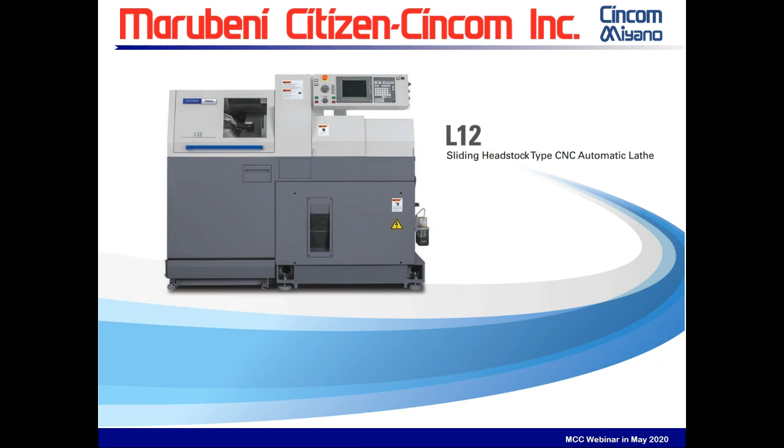I want to start today by taking a look at the L12 and some of its key features. Towards the end of this presentation, I want to invite Randy Nickerson to answer some questions. We'll have a whole section just on the laser and a chance to ask your questions with Randy directly. He is the head of our laser group, and that will be towards the end of our presentation.

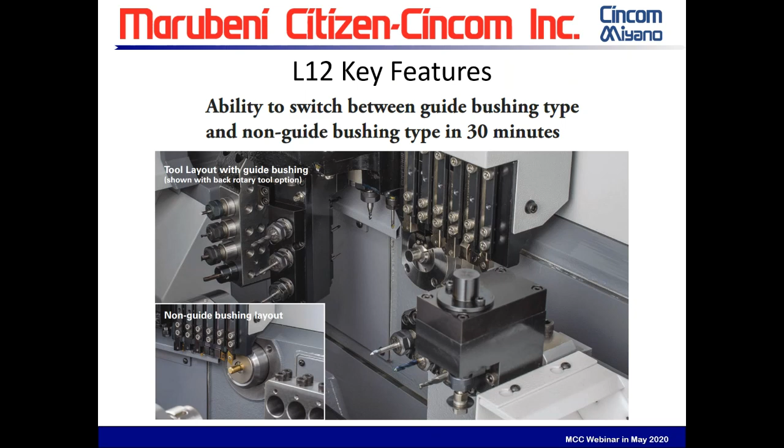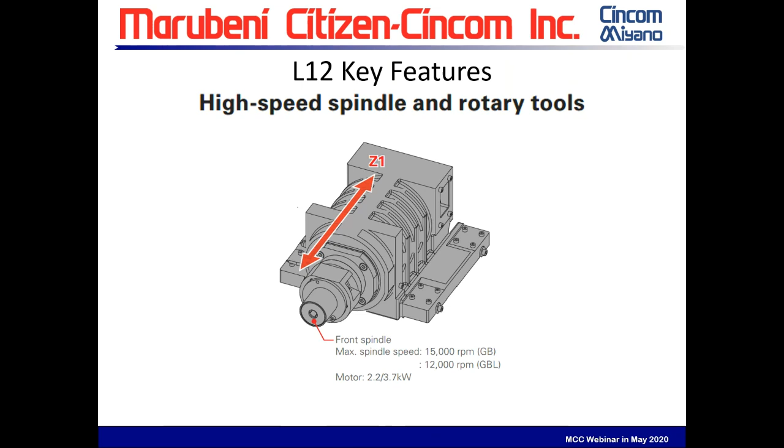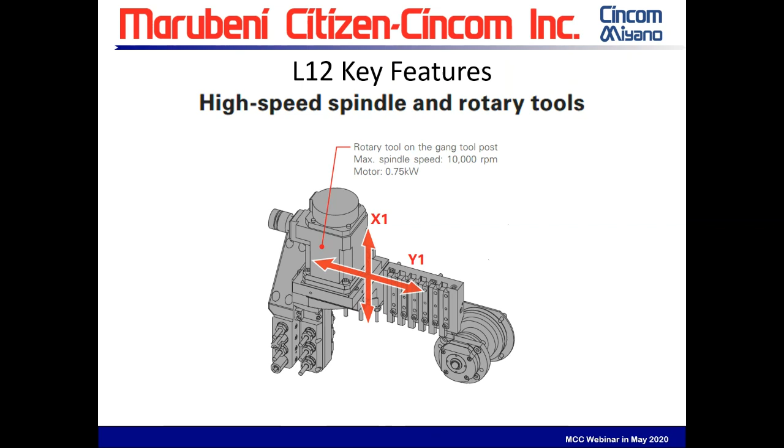Some other features: we have high-speed spindle and rotary tools. Our main spindle, once in guide bushing mode, allows us to run a maximum of about 15,000 RPM. In non-guide bushing mode, it drops down to 12,000 RPM. Its motor is rated for about 2.2 to 3.7 kilowatts, depending on torque. Our rotary tools on the gang have a max spindle speed of 10,000 RPM, rated for 0.75 kilowatts. Looking at our back spindle, that has a 10,000 RPM maximum and up to a 0.75 kilowatt rating. On this L12, we have the back rotary live tooling with a max spindle speed of 9,000 RPM, rated about 0.5 kilowatts.

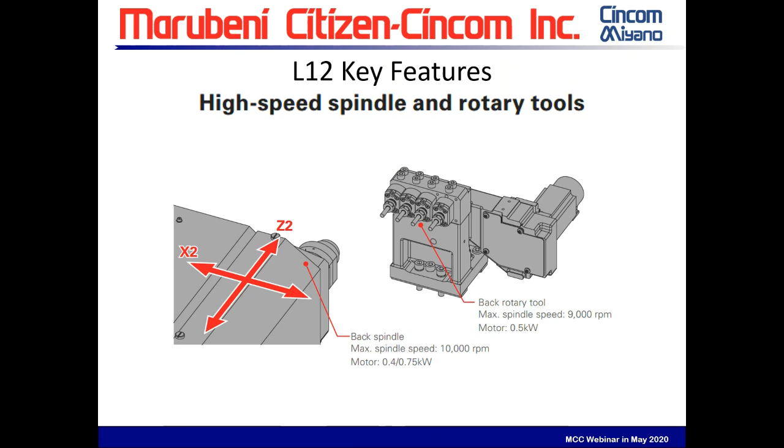Another key feature is on the front of our L12, we have a wide operator access door. The nice thing about this is having this full front door that moves up and out of the way makes working in the machining area much easier.

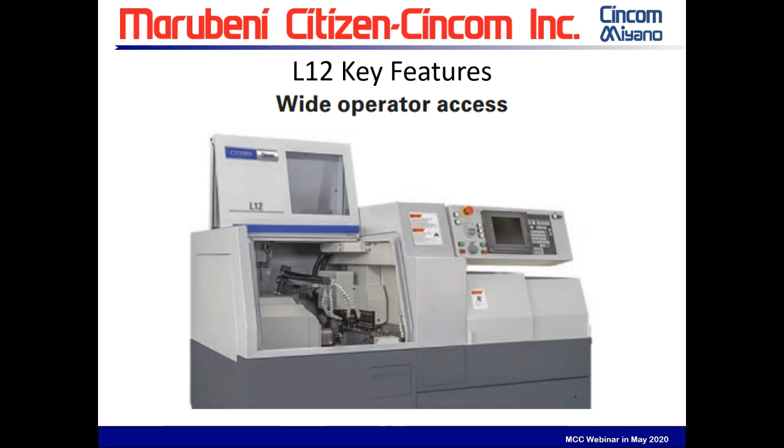Some other key features: the NC program input and output. We have USB, compact flash, RS-232, and Ethernet. This machine supports all 4 I/O formats as standard, so you get all 4 of them - you don't have to have an option for either of the 4.

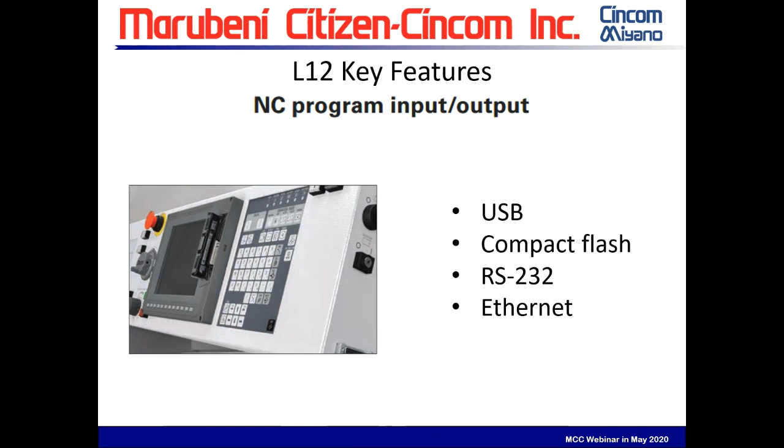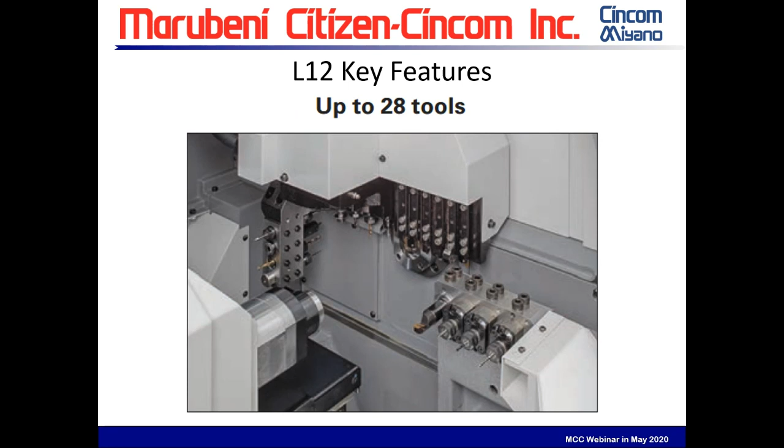Two optional tools I'd like to talk about: we have the GSE 3607, which is 3-face, 3-front, live, and they can be set at an angle, making things easier for cross-side angled holes. On the back side, we have the GSS 1530, which can be used for saw slitting and other features on the live backwork block.

An additional thing not shown here is the CSM4. They are cross live straight spindles, capable of reaching 24,000 RPM.

It's worth mentioning that the first live tool position, T7, located right next to the gang, is a non-removable station. It is ER8, but it only has a shift of 5 millimeters. The remaining removable spindles are ER11 with a 10 millimeter shift from the face of the guide bushing. So T7 allows us the ability to use smaller tooling closer to the guide bushing.

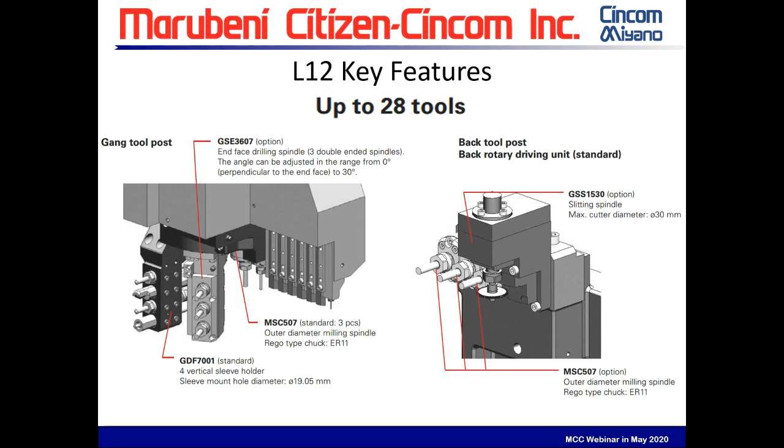As I almost mentioned earlier, deep hole drilling. On the side of this L12 subspindle or back spindle, we have the ability to do standard or deep hole drilling. From the face of the block to the face of the guide bushing is approximately 91 millimeters, or 3.582 inches. So yes, this can be used for deep hole drilling, but it can also be used for standard drilling as well.

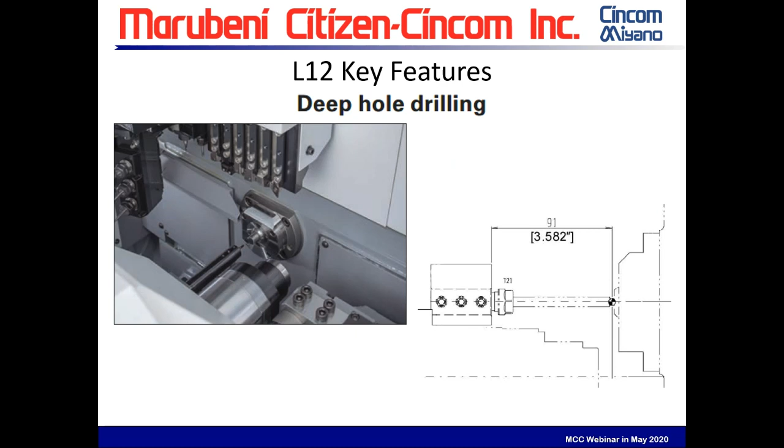Our optional LFV function is for effective machining of difficult to cut materials. LFV, for those that don't know, is low frequency vibration cutting. It's a technology for performing machining while vibrating the X and Z servo axes in the cutting direction in sync with the rotation of the spindle. As shown here, it can break the chips effectively, removing many problems. It's also effective for small diameter deep hole machining and the machining of difficult to cut materials.

For LFV machining with rotary tools, the LFV function and the rotary tool feed per revolution options are required. We have the availability of 3 modes that can be used on ID, OD machining, as well as threading. For more information on this, please speak to your local dealer or any MCC representative, and we'll be happy to provide you with more information.

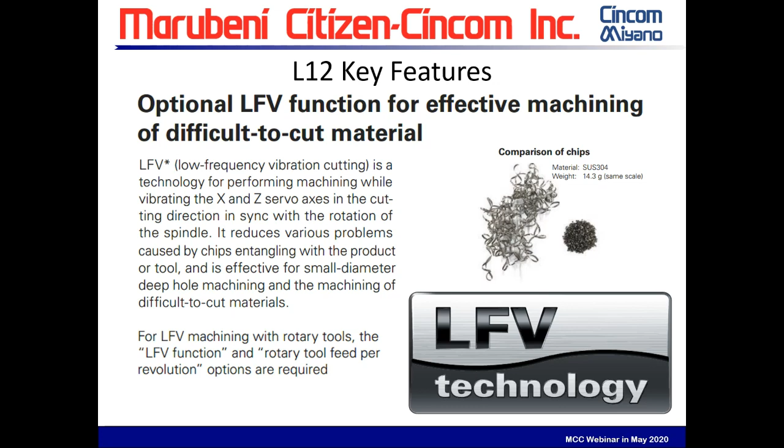We have user-friendly screens designed from the operator's perspective. This L12 Type 7 is equipped with a high-speed NC. We have an on-machine program check function with easy-to-understand illustrations. This can help you prove out a new program or check a new addition to that program, whether it's just running through the program with no machine movement, or using the handle to actually move through the program as if we were machining.

Also, having a visual representation can help everyone, including those new to the Cincom machines. When you're looking at the control, you're looking at a feature, and it has a highlighted picture. It shows you exactly what you're dealing with, whether it's a tool, what tools are in the machine, and a lot of other great features.

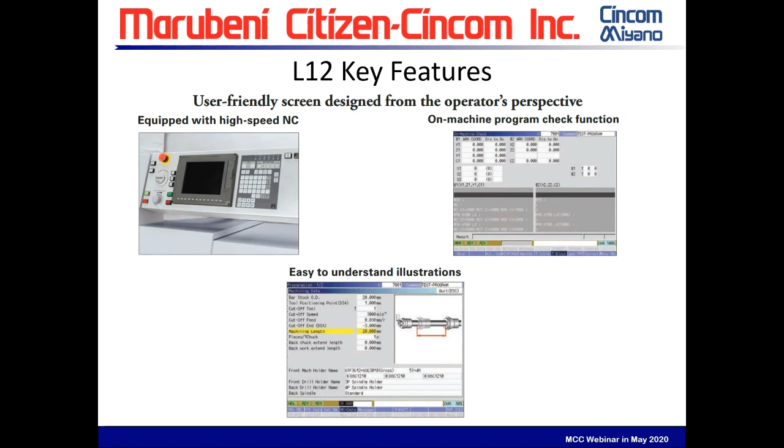Some other features we have include a code list display. Our code list not only displays codes and arguments that go along with that code, but the codes can be inserted directly into your program from this page. So instead of having to go back and forth, you can enter in this code, enter in the arguments, and then just insert it into your program.

Our eco screens can provide information for those who need to monitor power consumption and any other information.

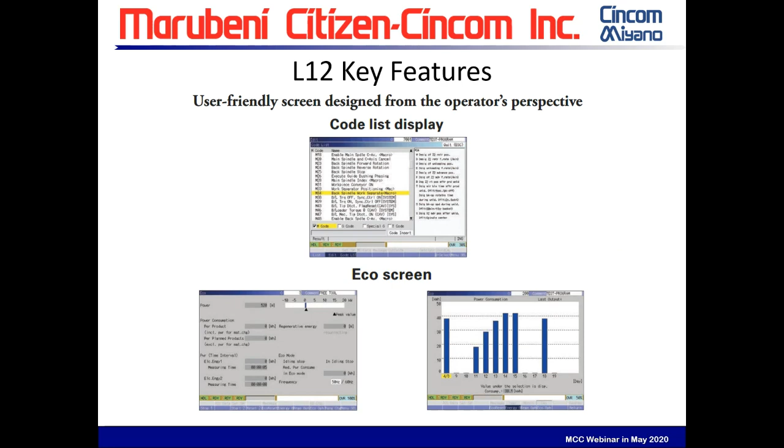Laser cutting and welding. Now we've talked about the L12, and we reach the laser portion of this presentation. We will be looking at the L2000 series laser system. Just a quick note on these systems: they are retrofittable on a variety of our machines, not just the L12. We've developed this as an add-on option that can be attached not only to new machines, but certain older generations of our L series machines. We've also designed it to have as little effect on the machine's capability as possible.

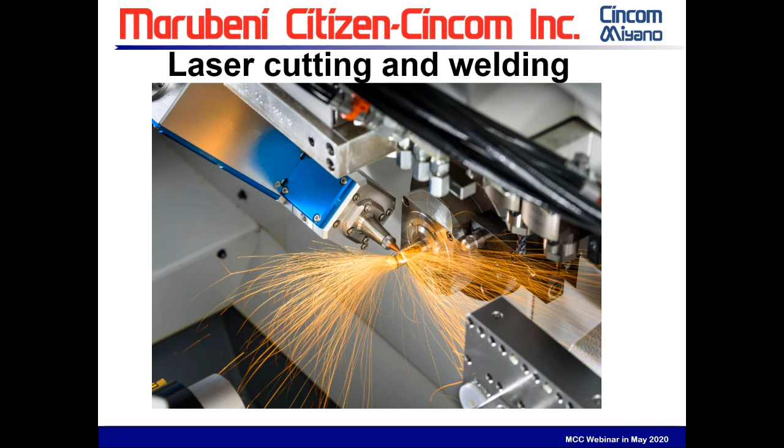Here are some pictures showing the laser head mounted on an L12. Please be aware that when the laser head is mounted, it's mounted in the gang, and we will lose the end work arm, which will have to be removed, and we lose the ability to use one crosswork live station.

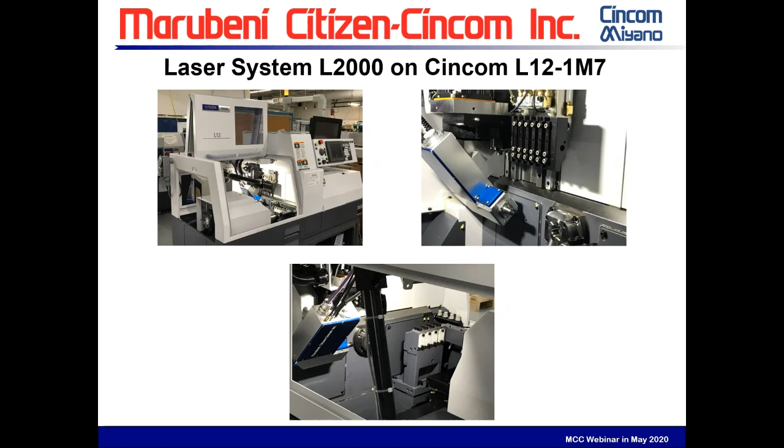These restrictions are specific to the L12. For example, the L20 is different. And depending on which machine the laser head is mounted on, with other machines you have the availability of B-axis and other capabilities with the laser. But in this case, we're just focusing on the L12 Type 7.

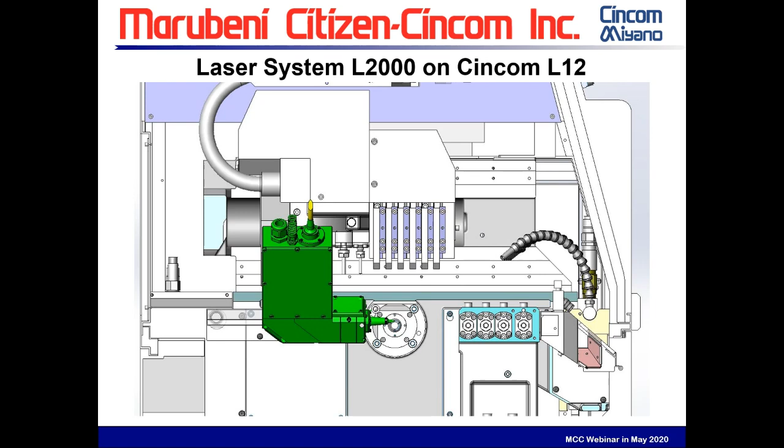Now let's talk about some of the traditional components of our laser systems, or any laser system. What is needed for a laser function is a light source, or laser oscillator, sending the beam through the fiber optic cable, which here is your transfer line, to the laser processing head. Here it is joined by a flow of gas, which here would be our assist gas, and passes through a nozzle to the part, where cutting or welding will be done. The gases we currently use are oxygen, nitrogen, and argon.

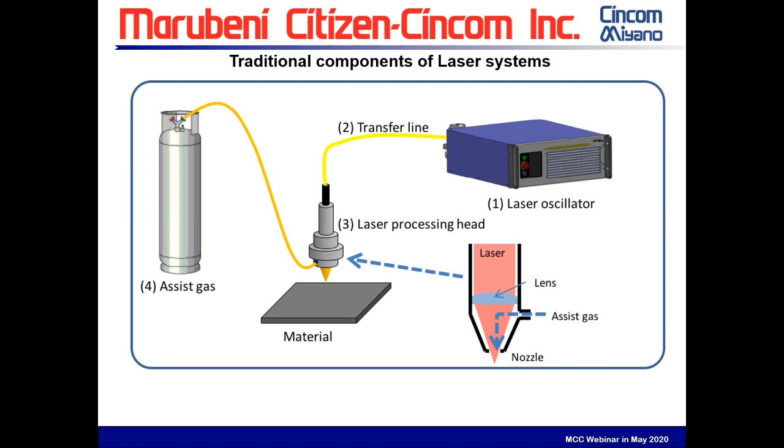Here we see some of the components of our Laser 2000 system. These are the main components. Our Laser 2000 system consists of the control cabinet, which holds the laser, the gas control, and our communication systems, along with the power supply panel. The Gen 2 system will also contain the CPU for our laser computer.

The laser, which is in our control cabinet, has a fiber cable permanently fused to it. The touchscreen PC holds the software that contains the recipes used by the laser during cutting and welding. Now this laser, or the touchscreen PC, is actually mounted at the machine near the control, for easy viewing and access.

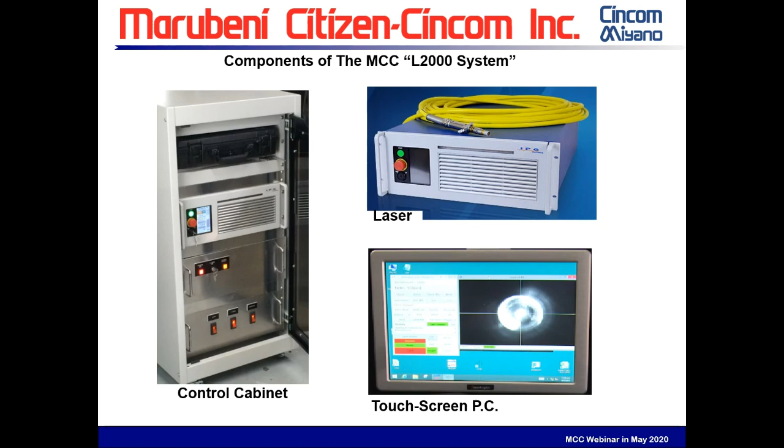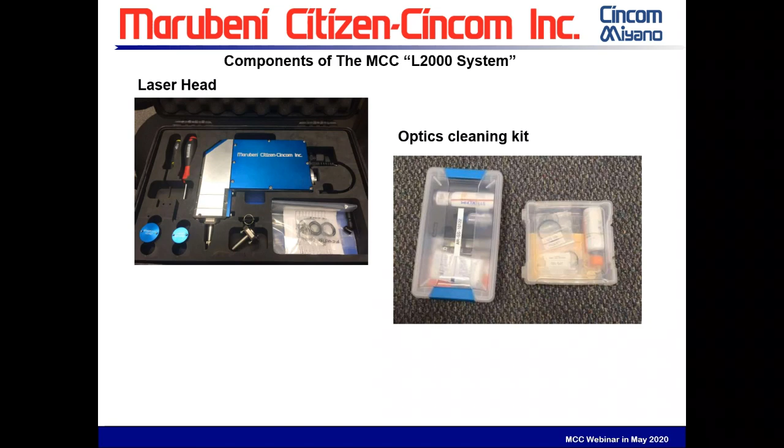Some other components in the picture show the laser head and our optics cleaning kit. The laser head is located inside the machine, as we show it on the gang. Another thing to mention is that our original machine window gets replaced with an acrylic laser protection, which is RoHS compliant and complies with ANSI Z136.1. So this way you don't need to have your glasses on when the door is shut.

You might want to ask, why would we want to offer this capability on a Swiss machine? We have many customers doing laser cutting or welding on a secondary machine, which is very expensive. Any secondary operation that is required adds cost to the part and more quality risks. Just like the twin spindles of our machine save time and money, so too will the addition of the laser into our machines. Now we have the ability to add a laser onto our lathes, but they cannot add a lathe to their laser machines.

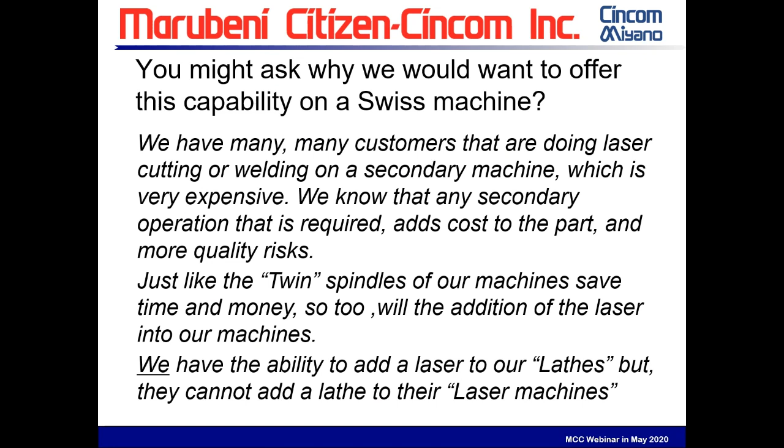Now we're going to talk about some of the benefits of laser machining: near endless geometric shape possibilities, minimal burrs (also known as dross), and faster than EDM machining.

Now, the benefits of laser machining on a Citizen machine: conventional and laser machining done in a single machine, machine accuracies of 0.00001 inch, or microns, an auto loading system which can handle material lengths up to 12 feet, meaning we can also utilize standard length tubing, and completing multiple operations in a single setup.

Now, if you need to do prototyping and don't have tubing to create your part, we can create tubing from solid stock for prototype work. Again, reduced handling, improved process control, and increased throughput. We are really in the realm of being only limited by our imagination and what we can fit into the machine when we start adding the laser to this. Shapes, anything - there are virtually so many combinations of things that we can do, I couldn't even list them all.

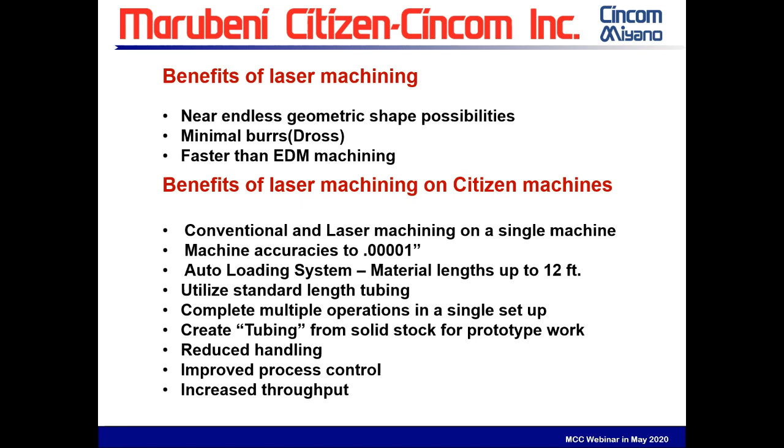Now, going back a little bit to a typical simple laser process, the part requires tubing to be cut and finished to a finished length, then cleaned for loading into a dedicated laser machine for the laser cutting to be done.

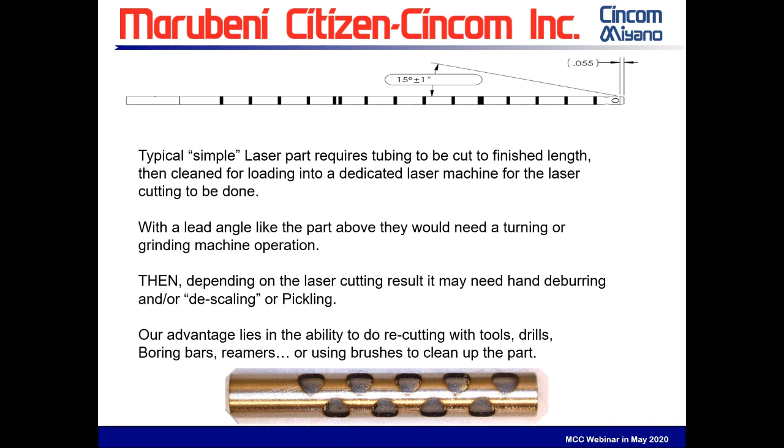Now, I know we're going to be talking with Randy later, but some of the things that are frequently asked are, what thicknesses can a laser cut through?

Well, this is going to depend on the material and which power level laser was ordered. As an example, we have up to 125 thousandths in stainless steel with a 300 watt QCW unit. For specific situation information, please consult our laser department.

Now, what is the width of the laser cut? This also depends on which laser unit and focal distance used, but it can be down to 0.0005, or 5/10. The thickness of the cut and power required can affect this. So again, more power will equal more melt away.

What is the lead time for laser systems? Well, we have them in stock, waiting for a machine to install them upon. Once we have the machine at MCC New England, we can install a test laser in approximately 3 days.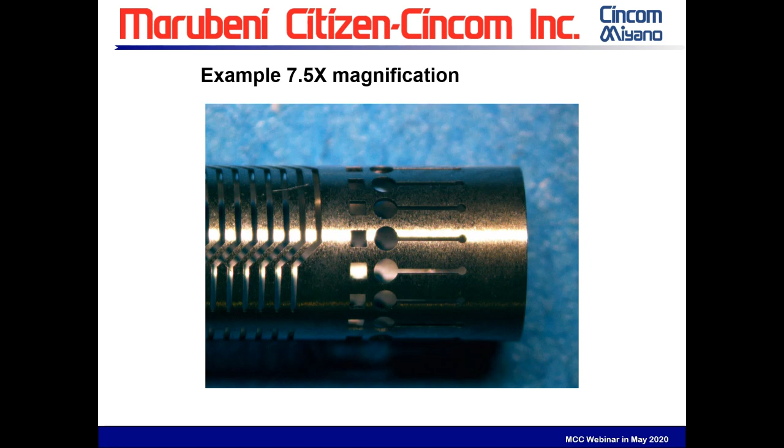Here we have an array of .010 diameter holes at 25x. The time it would take to do this with a drill, I mean, the laser can simply just do this effortlessly.

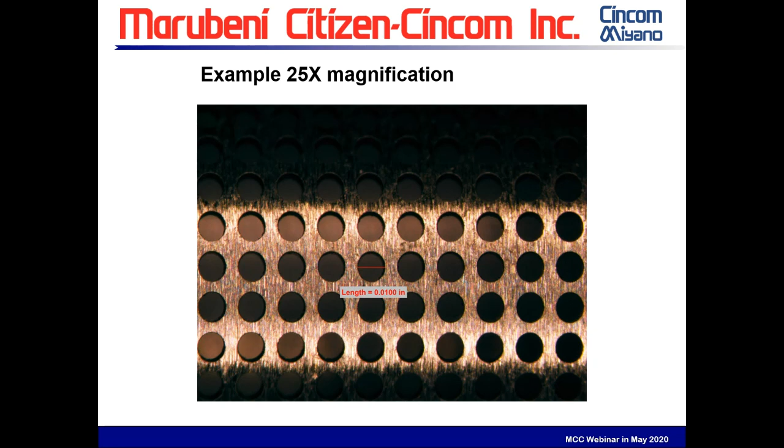Small complex features can be attained by using the laser. Again, looking at this part and this feature, we're at a 30x magnification. The length on this is 6 thou. And this feature wouldn't be allowed with traditional machining.

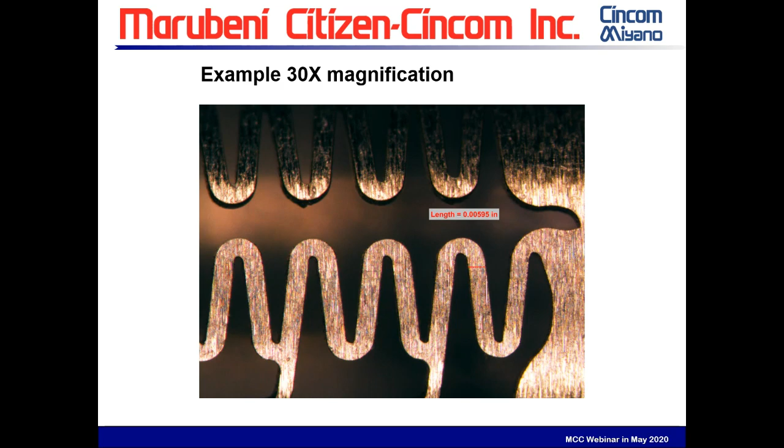Now here we're going to show some examples of laser cut times. We have windows in the top left, there's 4 of them, and the cycle time is about 12 seconds. There's a spiral cut feature underneath that, which has a feed of 2.0, and that's about 13 seconds.

Now we have a stent. This contains 36 diamonds, and that's done in 50 seconds. To our upper right, we have a J slot. Now that was done in 7.68 seconds.

This next thing is .005 and .010 hole arrays. Again, it took 235 or 236 seconds, but there are 360 holes in this feature. Now our stent here is 72 diamonds, so that's 92 seconds - it's a tighter pattern and contains more cuts. Something as simple as a bone cutter, a little over 6 seconds.

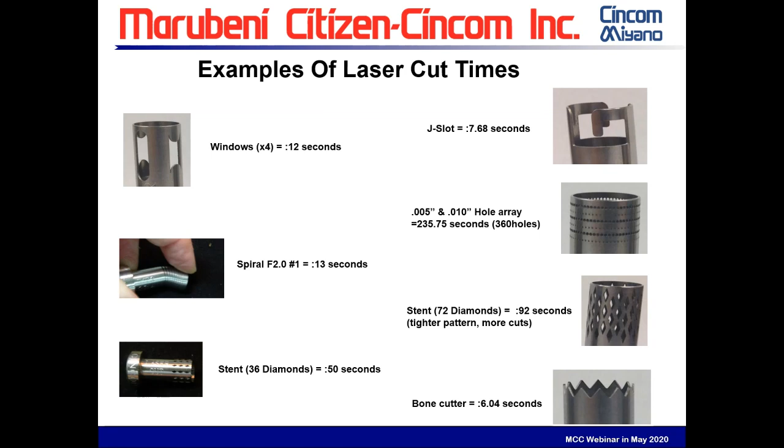Laser welding. So not only are we talking about laser cutting, but we can use the Microconic collet system for accuracy, because the runout on the part in the picture below needed to be less than 1 thousandth 5/10 after weld. And this is doing it with the same laser, so it's not like you need 2 different lasers, one for cutting and one for welding. They both can be done with the same one.

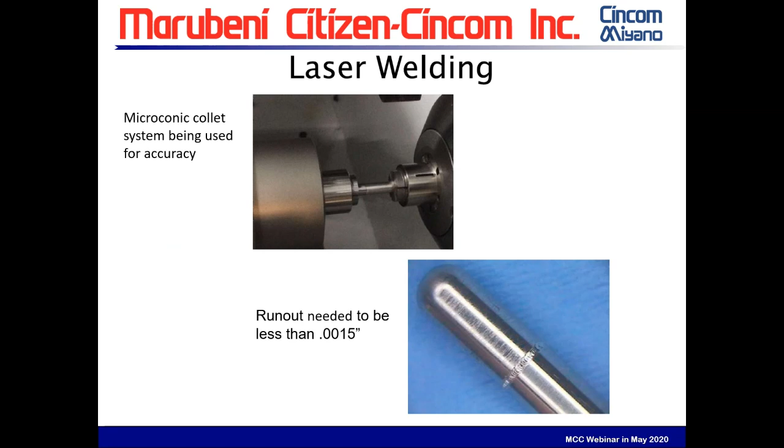Now, the next part, we're going to talk about focal length of our laser optics. On the L12, we use a 75 millimeter focal length. Focal length is changed by the focus lens and the nose piece.

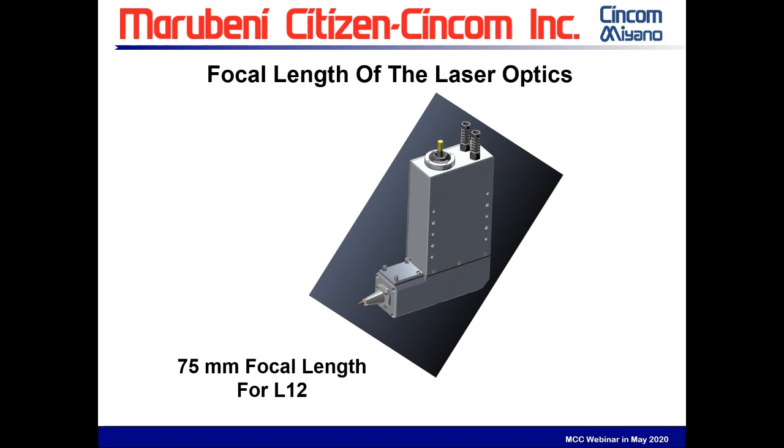Okay, at this time, let's take a quick peek under the hood of our laser head. So now, at the top, we can see our focus adjustment screw. This is all manual adjustment. We also have 2 nozzle adjustment screws, one on each side. Those are both contained in our focus lens housing.

Now, we have the unit down below, and then we have our nozzle retaining nut that's mounted to the cover lens housing.

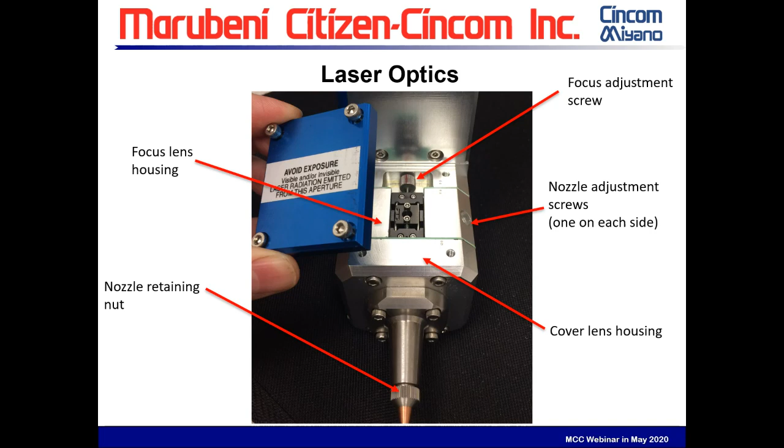Another thing to talk about, beam delivery. The beam travels through the fiber cable and passes through a collimating lens, that captures it and shapes it into an even column. Then it is directed at a deflection mirror, which points that towards another focusing lens, that takes the column and directs it to a point, the convergence of the beam. This point is our sharp focus, or cutting diameter, which will provide us with the cutting or welding action. At the 75mm lens, you're looking at a 10.66 micron spot size.

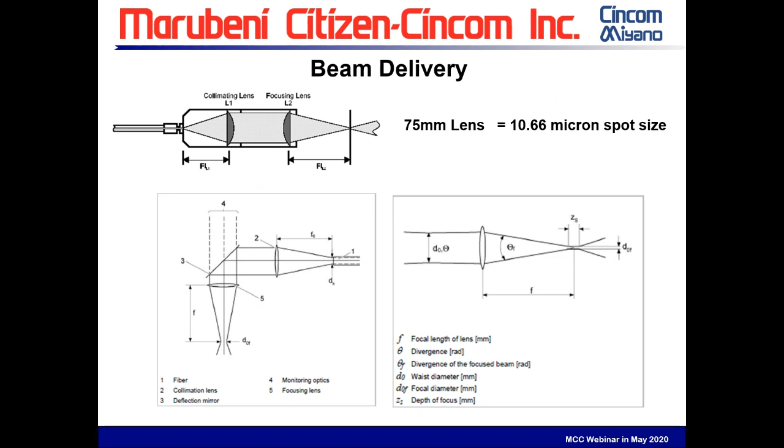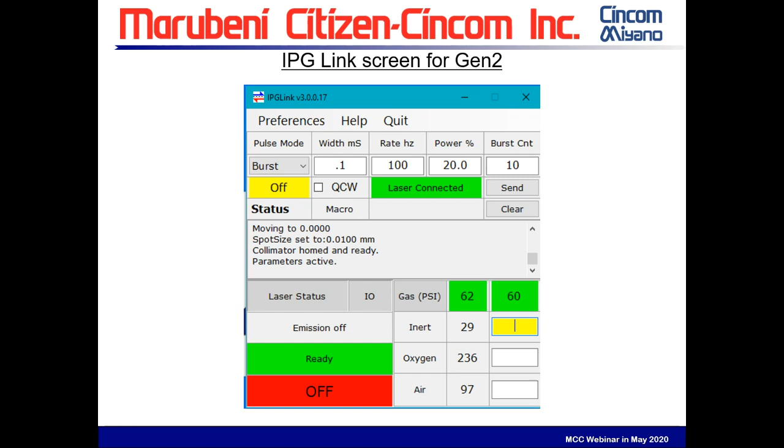Now there are some settings that are needed here, and these are our frequently changed settings with their description. We've got our mode: continuous wave, pulse, or quasi-continuous if available, depending on the laser head.

We also change our pulse width. That's the length or the size of the beam shots. We have rates in hertz, our frequency, which is how many pulse widths per millisecond.

Power. This is the percent of the laser unit to be used.

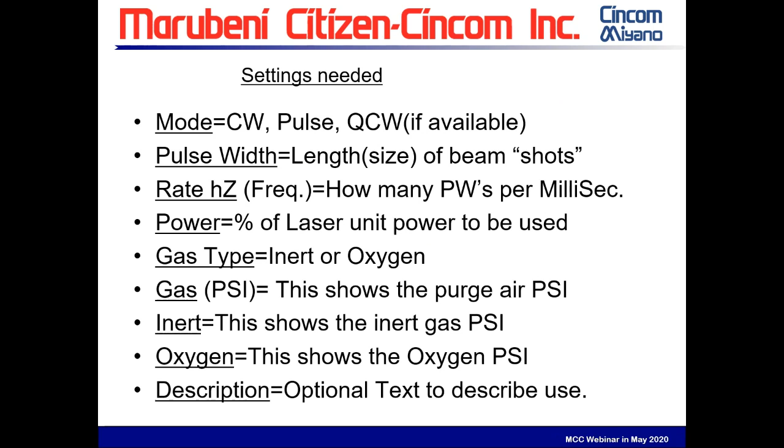Gas types, we have inert or oxygen. Gas PSI shows our purge air PSI. Inert, of course, shows the inert gas PSI, and oxygen will show the oxygen PSI. For description, optional text can be used here to describe whatever is going on.

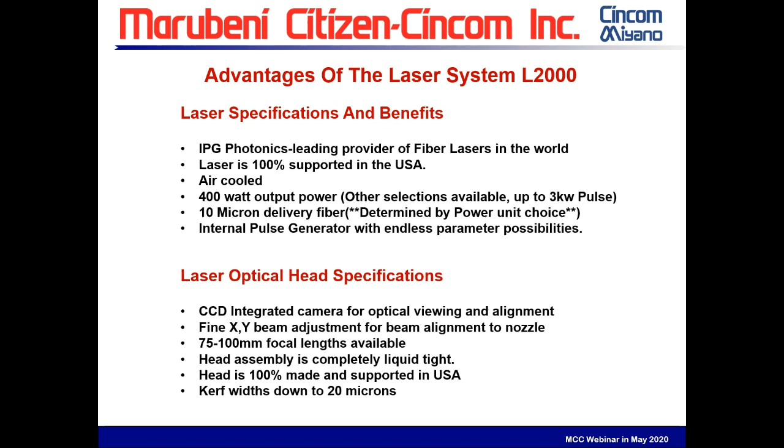Now, with that, we're going to talk about some of the advantages of the Gen 2 laser, new features. With the Gen 2, it's fully programmed and controlled from within the Cincom part program. And so are the following: programmable focus adjustment, programmable gas pressure, and programmable air pressure. Again, they all come from the Citizen-Cincom part program.

Now the assist gas, we have 3 supply lines, so 3 tanks or 3 types connected at one time. Chosen through our program, we can have 2 internal to the head and 1 external. Another thing to add is an AC unit within the control cabinet for temperature control.